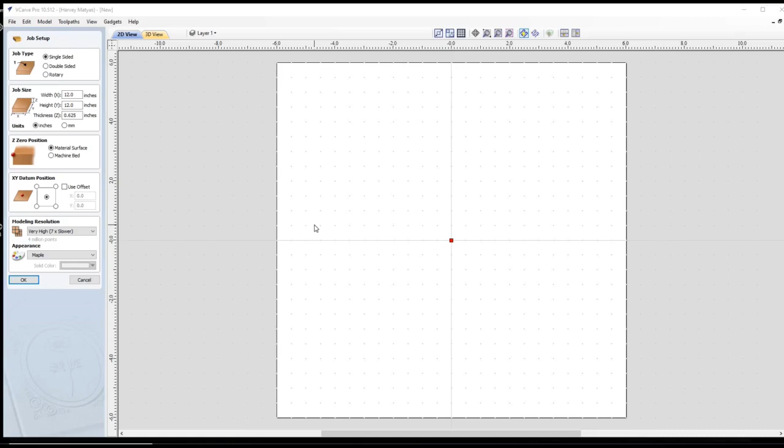The first thing we're going to do is go to the circle: 0.00, diameter will be 11.5, create.

Now next we need to make a circle that's half that size, so enter 5.75, create. We want to do it twice, close.

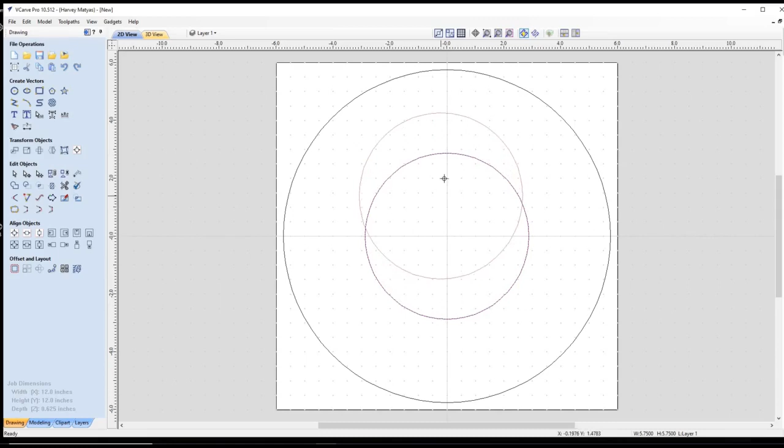Now we're going to take one of the circles that we duplicated and lay it on the circumference of our large circle and the origin. To check it, use the magnifier to make sure you're on top of the circumference and at the origin. That's good.

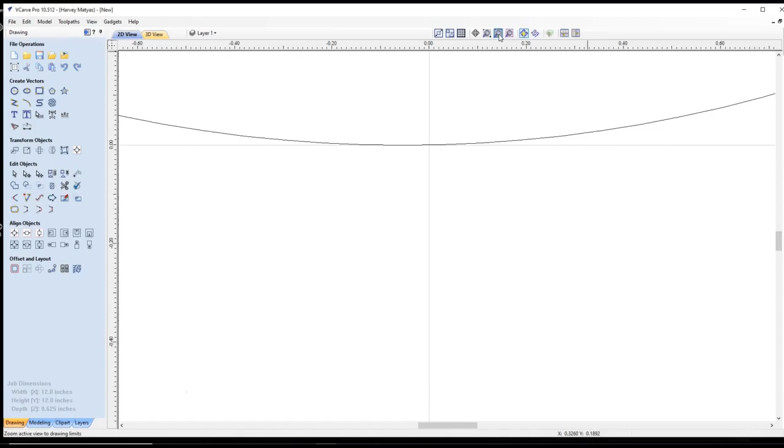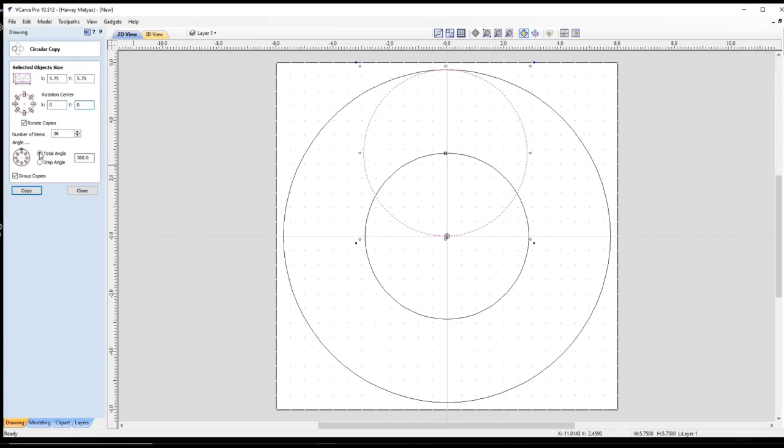Next we're going to make a circle array. Click the circle, go to circle array. Before you continue, make sure the X and Y are at 0. I guarantee you're going to make a mistake when you're doing this. We want to have 36 copies. Click copy. And there you have a pretty nice design, but it's not what we're after.

This drawing looks like we could machine it with almost hardly doing any more work. What we're going to do is resize our 5 3/4 inch circle to be 3 inches.

Apply. Now we're going to select the whole drawing. We're going to Vcarve it with a 90-degree V-bit. We're going to ignore the errors.

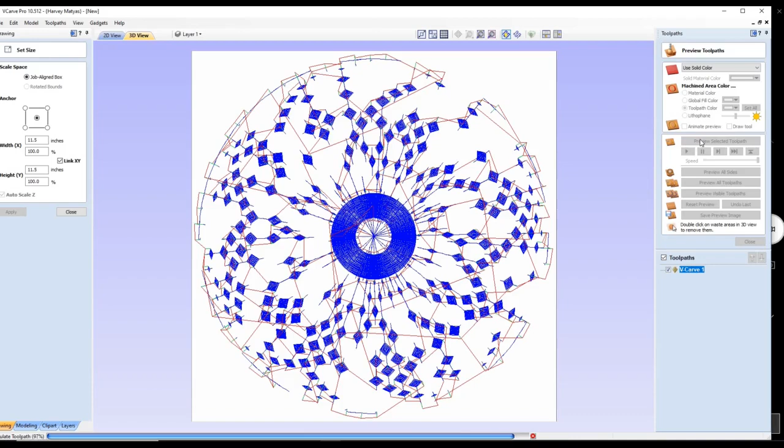And we have a mess. That is not what we're after.

So what else can we do? What we're going to do next is delete this and make some changes. First, our circle is intersecting the triangle, and that is what we want.

What we have to do next is intersect all these other triangular pieces. We're going to start making circles from the origin to intersect the points where these lines intersect.

What we're going to do is go to create a line, and then we're going to touch these 2 points. Notice how the cursor gets bigger.

Right now we're on X0, so Y is 1.9802 — write that down on a piece of paper. Go up again, wake it up. There it is: 2.881. Go up here: 3.6976. Go all the way up.

You also have to get the ones off to the side, like right here. Here is 2.43, 3.28. Write all those down.

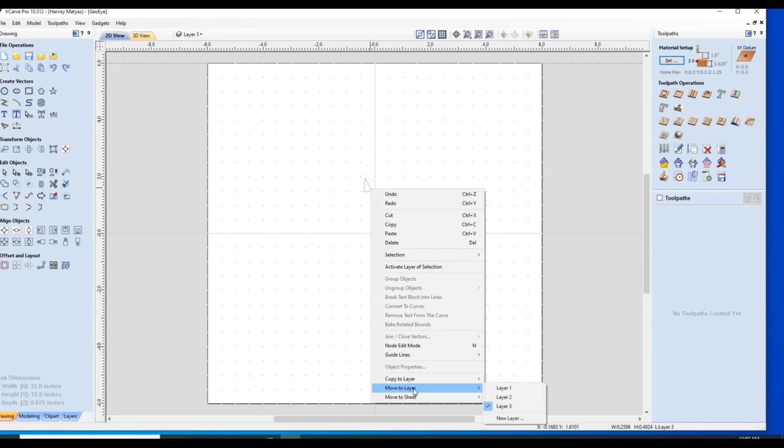Put your finger on the shift key. Take the scissors. Now I'm going to take this pie-shaped object. We're going to move it to a new layer, layer 4. We're going to make it active. We're going to color it red.

We're now going to do an array, circle array. It's ungrouped. Now we're going to validate it. There's a problem.

What we're going to do is undo the circle array. We're going to reduce it to 97% of the size. Do the circle array again.

And now it works. Turn these layers off, go back, make one active. Now here's where the numbers come in place. We know we did this one array, so now we're going to do number 1.

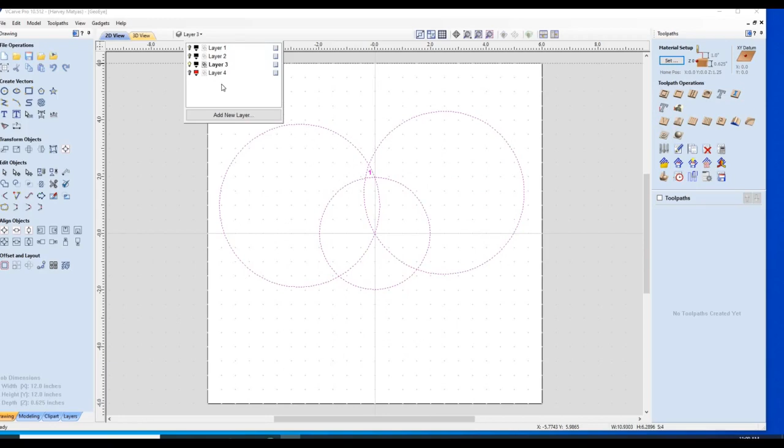We're going to copy. The reason we're copying is in case you make a mistake, you can go back and fix it. Make layer 3 active. Finger on the shift key. Now you can delete the 1.

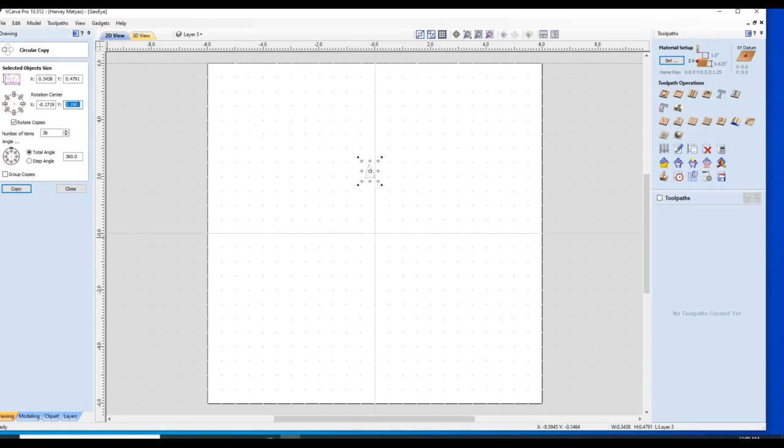Circle array. This time it works. If you have a problem, reduce it to 97% and run it to see what happens. Now basically we're going to rinse and repeat all the rest of the way.

When I did the second pie, I forgot to move it to level 4. You can tell there's 2 different colors. So basically I'm just going to copy this all, move it to level 4. Now we're good. Now we rinse and repeat.

I decided to do another layer for 3 things. One, by having layer 4 red, you can see where you're starting, so you really don't need the numbers. Two, periodically save. And three, I'll show you another problem.

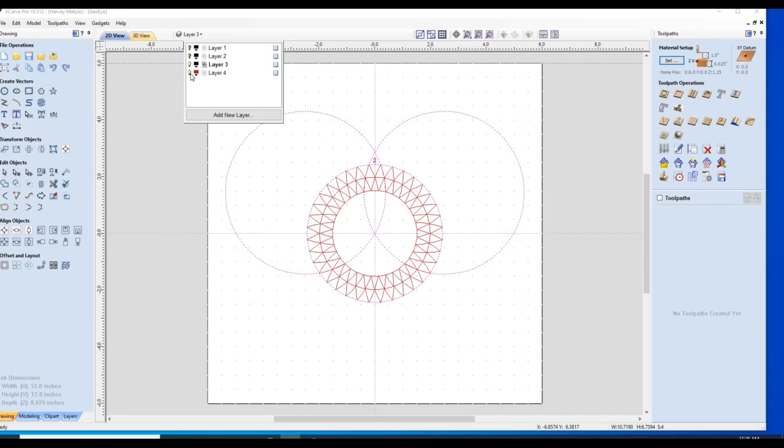Give her a copy to level 3. Level 3 active. You can get rid of the 2.

Notice when we did our vector cutting, it's open. So we just have to select this, close it with a straight line. Do an array copy, or circle array copy.

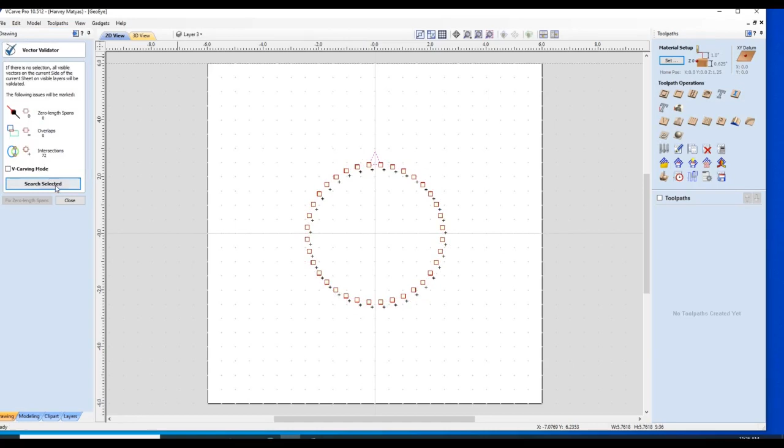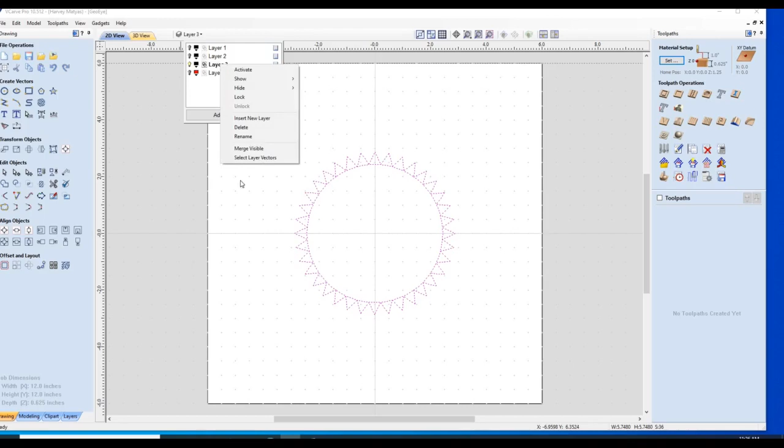Problem. Go back. Reduce to 97%. Problem solved. Let's move it to layer 4. There we go. Then you can save it again if you want.

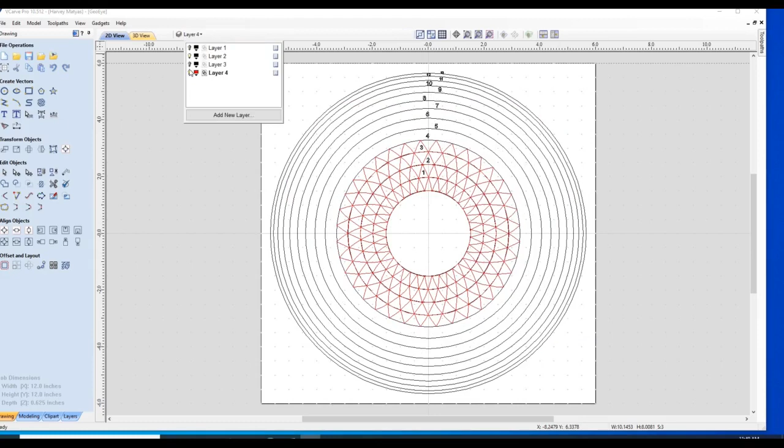Okay, here's another problem. I told you this project is frustrating. Copy to level 3. Make it active. I know it doesn't work already, so I'm going to reduce it to 97%.

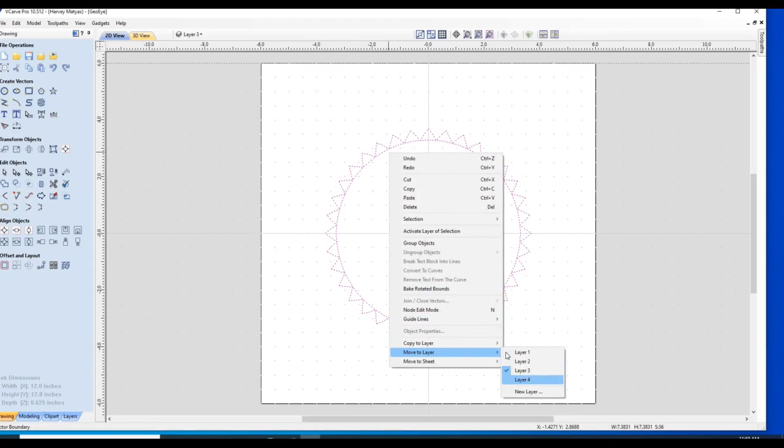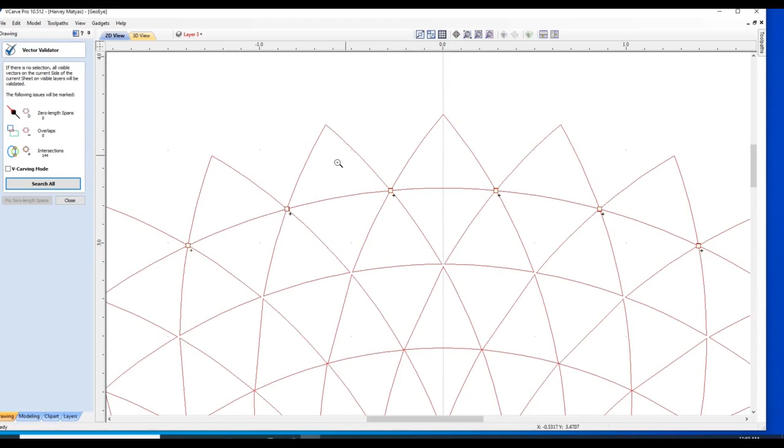All working. We're going to move it to level 4. Bang, problem. The problem is you have to get really, really down into this to find it.

They're just touching. The solution for this is to increase the outer layer to 100.2%.

Okay, two ways of doing it quicker. First, we got to group this and make this 100.2%, 0.2% bigger.

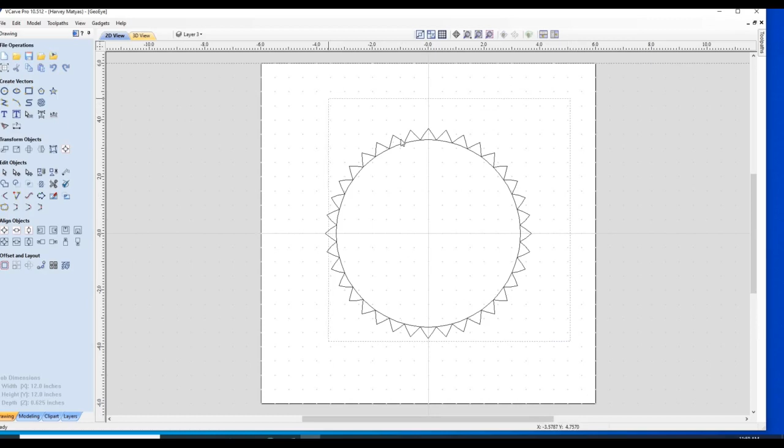When you check it, before you move it to layer 4, check it with layer 3. It works now. Before you move it to layer 4, that way it'll work, and when you validate it, you don't have to redo things, and then save it.

We have one more piece to do. However, as we're slowly changing the sides to avoid problems, you can see why we have to. We're getting very close to the top. So if you want to do the last triangle or not, it's up to you. But we're really getting close to the top of the line.

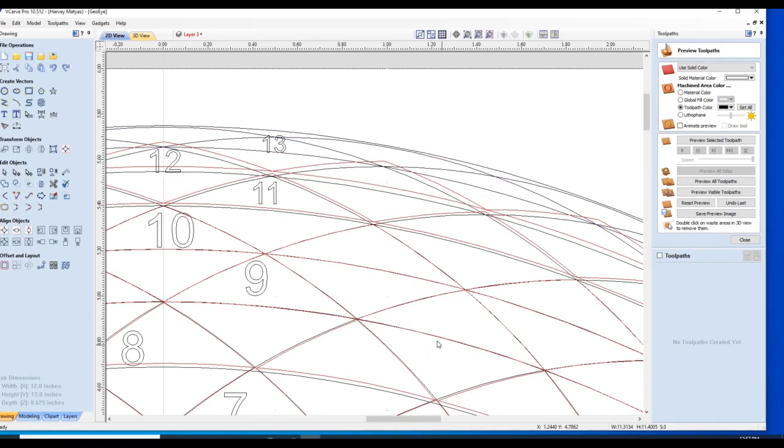We are almost done. The only thing we could possibly do, if you wanted to, we could try this area down here, making sure they're all closed vectors. It's an interesting design. Right now I'm not going to do that.

To show you how close we were every time we made the pie shape a little bit bigger, how close we are to the circumference of our circle. Here's the line, there's the red line from level or layer 4. Level and layer to me are the same. If I confuse them, use them interchangeably.

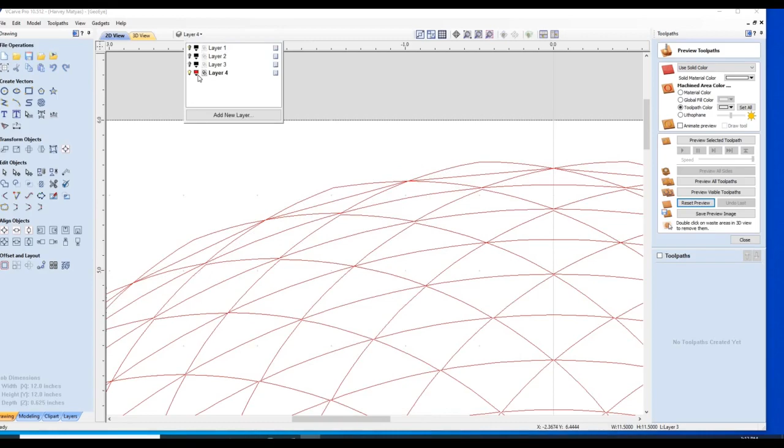So now what we're going to do is we're going to copy the circumference of the circle to layer 3, which is basically empty right now. We're going to select all the pieces of pie. We're going to V-cut it.

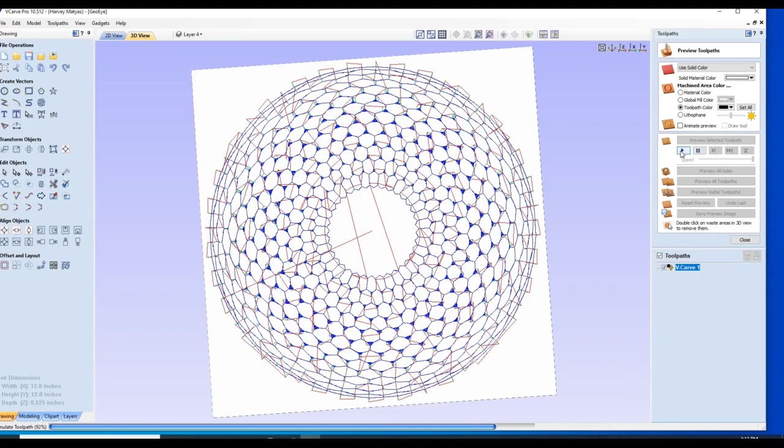I have a flat area of 0.1. It's up to you if you want to do it or not. We're going to calculate it. There's one vector which I can't find. Notice it doesn't affect it.

Now we're going to go to layer 2, or I'm sorry, layer 3. We're going to use an end mill. I'm going to cut out the outside. We're not going to use tabs. You can use tabs. I'm not using tabs so I can show you what it looks like.

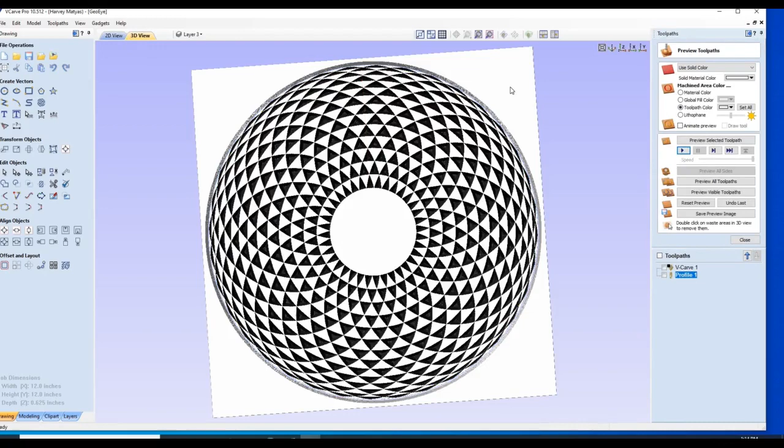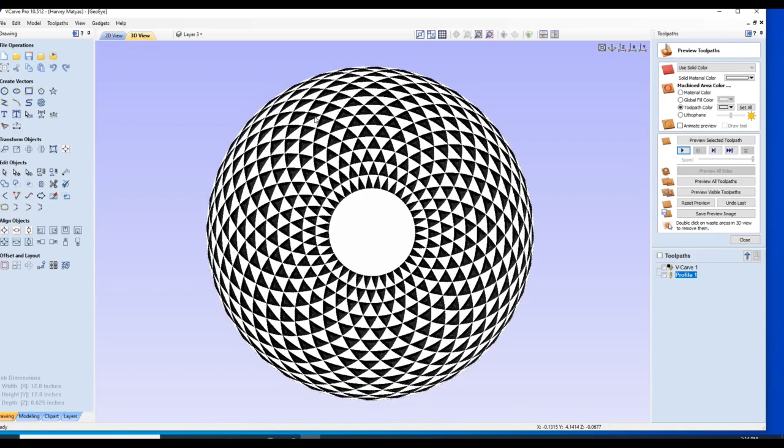Well, there is our finished product. Now, I machined it already. I'm not going to do it again, but basically I took a piece of wood a little bit over 12 inches by 12 inches, painted it black, let it dry for a day, put it on my CNC machine and cut it out. So please leave your comments below and hopefully I'll do another video.